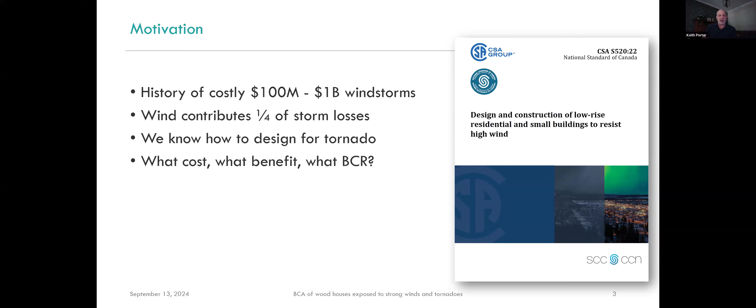Those features better ensure that the building transmits wind forces from the roof and the sides of the building, where the wind pushes or pulls on the building, down to the ground. A building that complies with that new voluntary standard can resist virtually every windstorm that Canadian weather can throw at it, now and for the rest of its lifetime.

But CSA S520 also reduces the potential for future damage. With those stricter requirements, you get less damage, less potential for damage. So CSA S520 helps to avoid future losses, which we can call a benefit of the new standard. We calculate the avoided future losses and say that's the benefit of the standard.

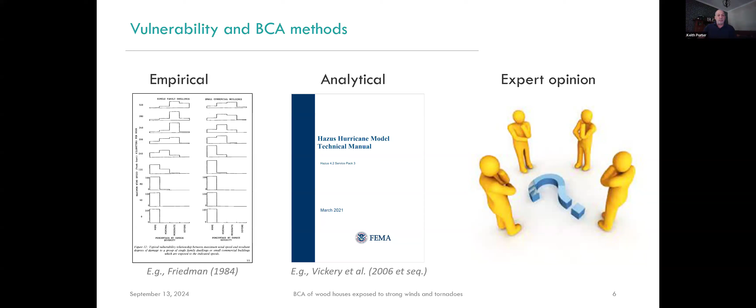And if an analytical approach exceeds your resources for doing benefit cost analysis, then expert guessing sometimes has to do. So these are the three methods one might turn to. In my presentation today, I'm going to talk about the analytical approach, which is what I had to do.

In this case, doing a hazard analysis means estimating how frequently and severely the wind blows on the building. Then you do a structural analysis, where you calculate the forces on the structural members, every beam, every column, every connection, given that the wind is blowing with such and such a pressure or speed.

Given member forces, we can calculate probabilistic damage to individual components in a damage analysis. What happens to the sheathing? What happens to the connections? What happens to the connection down to the ground? Then we can estimate the losses given the damage in what we call a loss analysis, such as the cost to repair the damaged building components.

And we can calculate a variety of performance metrics from the output of all that analysis, such as benefit cost ratio, among other things.

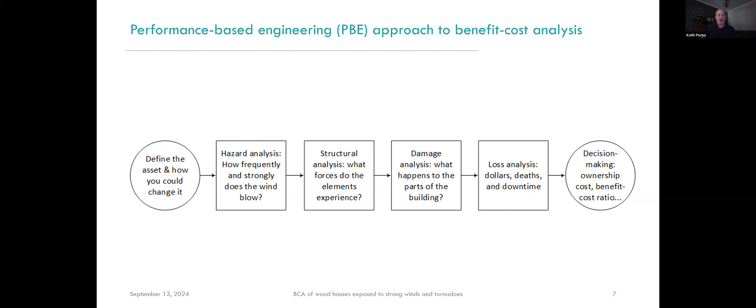So how do we do the asset definition for this particular case? What evidence do we have for the asset characteristics of the kinds of buildings we're talking about today? In prior work with ICLR and with Dan, I compiled a stratified random sample of 102 houses across Canada, 11 to 12 houses in each of 9 communities, ranging from small to large and east to west. The data generally come from Zillow and from Google Earth Street View, and they include things like latitude, longitude, stories, square footage, beds, baths, year built, cladding, perimeter length, and area, and so on.

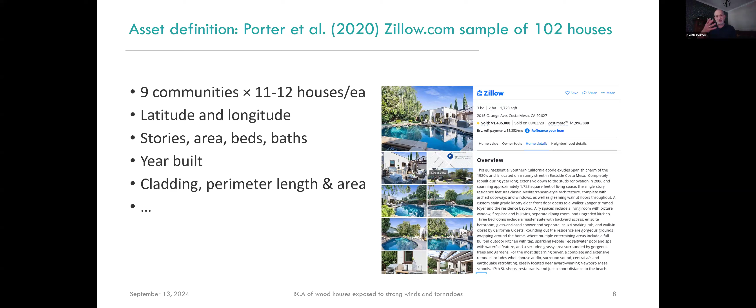The picture on the right just shows you what a Zillow listing might look like, where I could get all of that information.

Then we move on to the hazard analysis. That's where we calculate how frequently and severely the wind blows. For that, I drew on 2 sources. There is an organization called PCIC that offers future straight line wind hazard. That is wind pressure that has 1 in 10 year and 1 in 50 year exceedance frequency.

The Pacific Climate Impacts Consortium, PCIC, offers estimates of future weather under various climate scenarios. I used a sort of middling shared socioeconomic pathway that reflects 2 degrees centigrade heating. Canada has already warmed 1.2 degrees centigrade over the period from 1961 to 1990, and 1.9 degrees centigrade above the 1948 to 2022 period, according to Environment and Climate Change Canada. So 2 Celsius seems reasonable, and if anything, perhaps a little low.

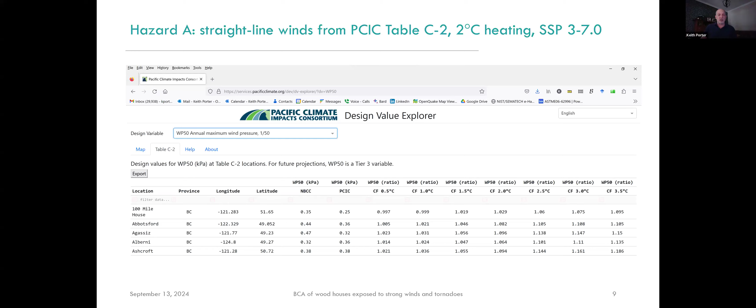So the PCIC data talks about straight line winds, the kinds of winds that we experience normally as weather comes through our communities, and it doesn't include tornadoes. To characterize the added hazard from tornadoes, we can draw on the Northern Tornado Project and from other publications.

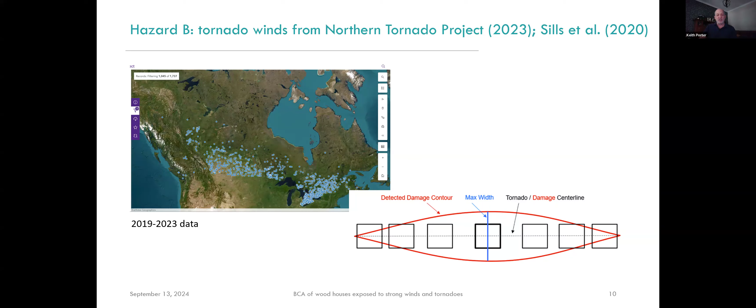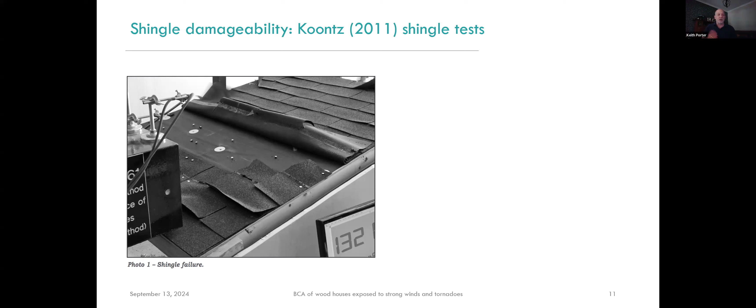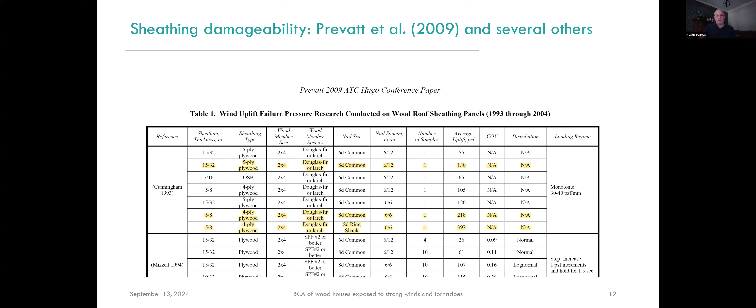Here are some tests of roof-to-wall connections. That's the connection between the roof truss and the top of the upper wall. We've got some from laboratory tests by this person Cheng, and there are some tests by Simpson Strong-Tie that we were able to draw on. That's a big manufacturer of structural components that we're able to draw on for this study.

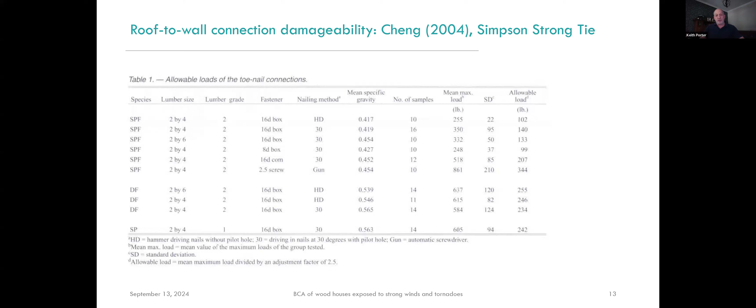Now, the published data of roof-to-wall connections didn't cover everything we needed. We had to perform some roof-to-wall connection tests with what you're seeing here is a 2-ton engine hoist.

We tested the toe-nailed connections that connect the roof truss to the top of the wall. You're seeing in the middle picture a couple of nails, that's two sides. This horizontal 2x4 represents the bottom chord of a roof truss, and there's two nails on one side and one nail on the other that connects it to the top of the upper story wall, represented by these two horizontal 2x4s here. The picture on the right shows this same connection after we pulled it apart using this blue engine hoist thing. So that gives us information about the capacity of this connection.

The toe-nailed connection, like you're seeing here in the middle, fails at an uplift force of about 160 kilograms per connection. That's the force that 3 strong men could impose on this connection. So 3 strong men could pull the roof truss off of the top of the wall.

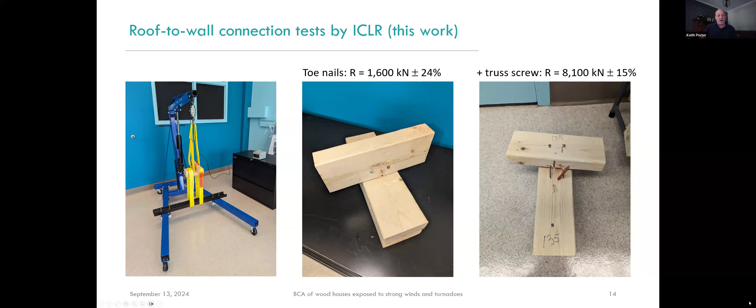The picture on the right shows this orange thing, that's a truss screw that increases the connection capacity by a factor of 5. That's much stronger, so strong men could not pull this thing apart. It's much more able to resist tornadoes, and add up all these orange screws around an entire building, and it adds about $190 to the cost of a house. So very strong for very low added cost.

Now, for the loss analysis, that's where you estimate the repair cost given the physical damage. We draw on a variety of authorities. Here are some sources of roof repair costs, other residential repairs, the cost to replace damaged content, the cost of additional living expenses - that's when you're displaced from your home and have to pay for a hotel or whatnot - and carbon costs. So these are sources for the dollar amounts that we apply to each of these sources of loss.

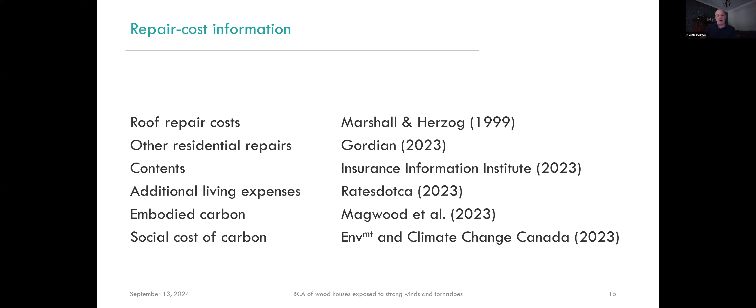Okay, so that was a sample of the literature we're drawing on. Now I'm going to summarize my analytical method. I defined the asset, the house, in terms of the building components that we normally use for structural analysis, with particular focus on the features that CSA S520 enhances. Those features are shown here, for example things like thicker roof sheathing and different sheathing nails and stronger roof framing and connections, roof-to-wall connections, and so on.

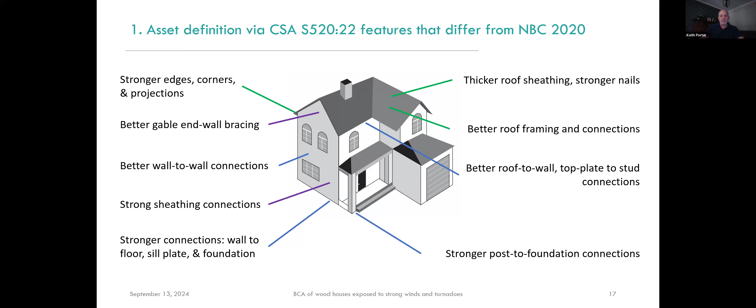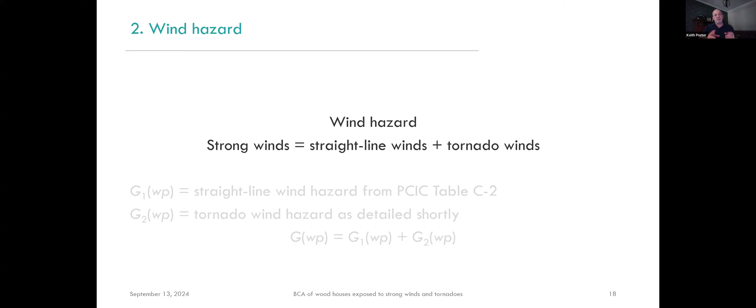Step 2, the hazard analysis, requires that we characterize wind hazard in terms of the frequency with which various wind pressures get exceeded. The exceedance frequency for any value of wind pressure is the frequency of that wind pressure from straight line winds - that's the normal day-to-day kinds of storms that we see - plus the frequency of that level of pressure from tornado winds. I'm graying out the math here and all the equations, just so you know the math exists and there are equations, but I'm not going to trouble you with walking through them.

Now, we want to design for strong winds without requiring that homes are built for winds that are extremely unlikely to experience in their lifetimes. Strong winds blow less frequently, weak winds blow more frequently. Some wind pressures are extremely rare, but can happen during the life of a building, albeit with low probability.

The building code has information about how strongly the wind blows in various places. It has a table, like the one shown on the left, that tells us how strong the wind is that has a 1 in 10 chance of striking your house in any given year, and a 1 in 50 chance of striking your house in any given year, for several hundred different locations around the country. Now, the picture on the right turns those 2 points, the 1 in 10-year wind and the 1 in 50-year wind, into a curve so that we can estimate how frequently other wind pressures happen at each of these places.

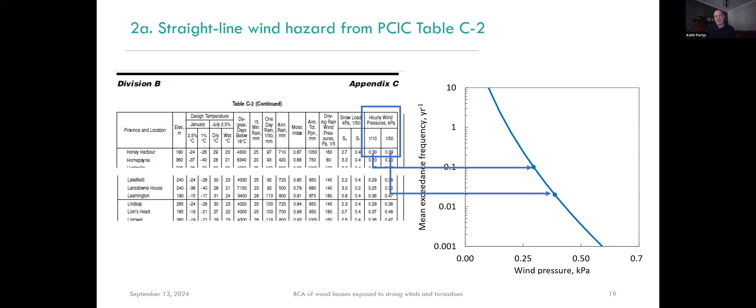Now, the climate's changing. The building code's table mostly draws on the past for its data, but we want to know about the future. The Pacific Climate Impacts Consortium, PCIC, that I mentioned before, estimates future wind hazard and provides a table just like the one in the building code, but reflecting future weather. That was the one where I told you we're going to use the shared socioeconomic pathway that assumes 2 degrees centigrade. So I use the PCIC table for my calculation of straight line wind hazards.

For tornado hazard, I calculated the exceedance frequency of various levels of wind pressure as a function of four things: the tornado occurrence rate per 10,000 square kilometers, the fraction of tornado track length that is EF0, the weakest tornado, EF1, EF2, etc., the tornado footprint area, that lens-shaped thing that has different lengths and widths depending on the maximum EF, enhanced Fujita rating scale, and the pressure distribution across the width of the tornado. A tornado has lower pressures and higher wind speeds at its center, and lower wind speeds, higher pressures at its edges.

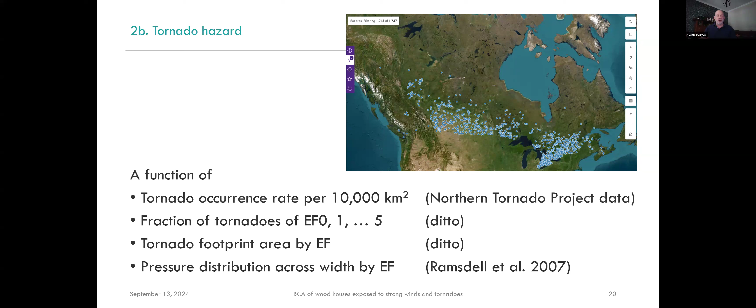I'm going to skip over the math once again for the sake of brevity. It's just an application of a theorem that multiplies different outcomes by the chance of each outcome occurring to give you long-term averages.

The third step is the structural analysis, where we calculate member forces conditioned on wind pressure. This isn't a webinar full of wind engineers, so I'm going to skip over the equations. Suffice it to say that I use the National Building Code of Canada's prescribed equations for the external and internal pressure on building components. I use that to calculate the force on every piece of plywood, every 2x4, and especially on the connections between them, the nails, the screws, the bolts, and so on. Those are the places where structural failures most commonly occur.

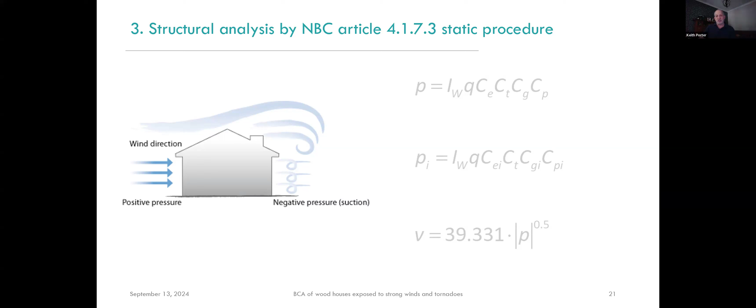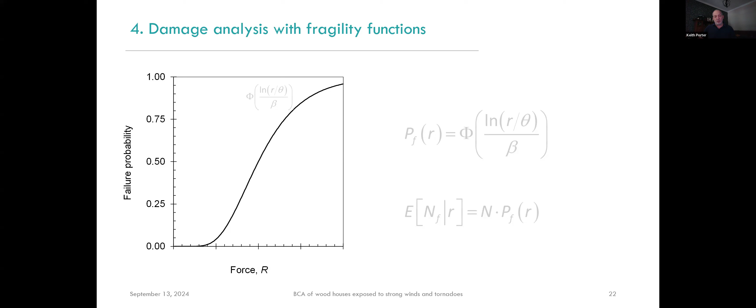The fourth step, the damage analysis, requires characterizing the failure probability of each damageable component as a function of the force to which it's subjected. We define failure in a way that relates to the repairs, such as tear off of the roof shingles. I'm going to skip over the math again. Curves like the one you're seeing on the left-hand side of the screen are called fragility functions. They tell us that if you put a specific force into a connection or some other part of a building, there's a chance somewhere between 0% and 100% that it's going to break. We make those fragility functions from laboratory tests, like the one I showed you with the big blue engine hoist, and some tables of other people's laboratory tests.

Now step 5 is the loss analysis. I've grayed out the equations, just know that they're there. You calculate the cost to repair a component category, like all the windows, as the product of three things: the failure probability per window, times the number of windows, and the unit cost per repair, the cost to repair one broken window. We're careful about double counting, and we also make reasonable assumptions about thresholds above which you just replace all the components, whether they're damaged or not.

You sum over the component categories to get the total building repair cost. You add up the cost to repair the shingles and the roof sheathing and the windows, et cetera, to get the total cost to repair. You normalize by the building replacement cost to get what we call the damage factor. So you might estimate 10% repair cost, meaning 10% of the cost to replace the building, and that's the degree of damage from some level of wind pressure.

We call a relationship between that percent repair cost and wind pressure a vulnerability function. We apply that vulnerability function to the building, to the contents, the additional living expenses, and to carbon, the value of all those things, to get the total loss at any given level of wind pressure or wind speed.

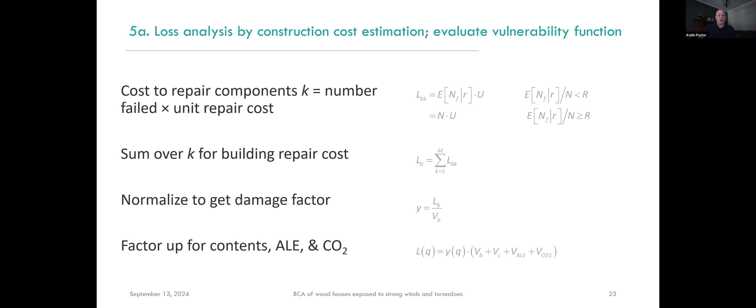Lastly, we calculate the benefit cost ratio. Again, I've grayed out the equations. The point is that we integrate the vulnerability function and the hazard curve to get expected annualized loss, the long-term average annual loss from winds. That is, we calculate the loss given that a house experiences 75-kilometer-an-hour winds times the chance that it's going to experience 75-kilometer-an-hour winds, and we add that with 70 and 80 and 85, et cetera, to get the long-term average annualized loss.

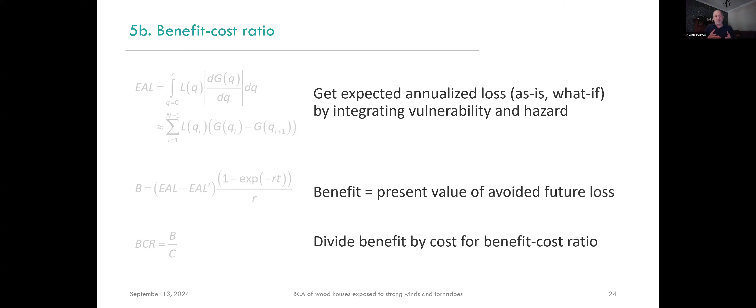We do that under two conditions: compliant with the National Building Code of Canada, and compliant with CSA S520. That's the long-term average cost under as-is and what-if conditions. The benefit, in terms of avoided future losses, is the present value of the difference between those two things, the present value of, say, $100 per year of loss under as-is conditions minus $50 per year of loss under what-if conditions. You add that up over a period of time and account for the time value of money, and that gives you a present value of the benefit, the avoided future losses. The benefit cost ratio is just the benefit divided by the cost.

Okay, so what I've shown you so far is a general method. Now I'm going to show you the results of when you apply it to new Canadian houses.

I told you that I need to define an asset. Now I got one from a company that we often deal with, Doug Tarry Homes. It's a very progressive builder.

Doug Tarry Homes provided us with drawings of a 3-bedroom, 2.5-bath that approximately matches the average newer house from that stratified sample I told you about earlier on with all the Zillow data. I've grayed out the interior features here, but the drawings show all the details, the materials, the geometry, and so on.

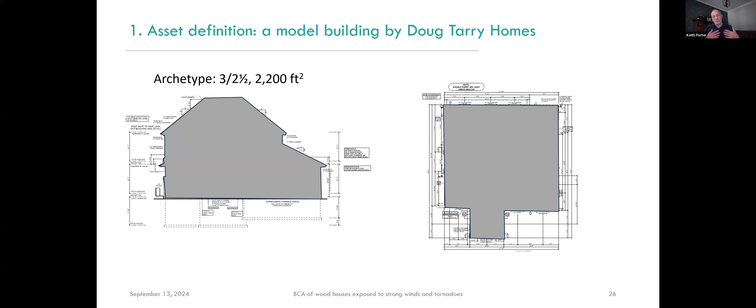I did what engineers call a quantity takeoff to calculate the cost to comply with CSA S520. Quantity takeoff just means, okay, how many square feet of roof cover and what is it you have to do differently to comply with CSA S520?

And in this case, you use 6 nails rather than 4 for the roof cover, and you have to estimate the cost for each of those things. In this case, it's 3 cents per nail, and there are about 2,700 nails on the roof cover of this particular house, and that means it adds $88 to the cost of construction to comply with CSA S520 versus not complying. You do that process for all these other differences between CSA S520 and the National Building Code.

You add in overhead and profit for the contractor, and you get a subtotal for the vertical, for the things that resist the vertical forces from wind, the tornado uplift. The added cost is about $3,600. That's about $1.73 per square foot, and that's consistent with findings from other sources that do approximately the same thing. So the vertical load path features of CSA S520 add about $1.73 per square foot to the cost of construction of a new house.

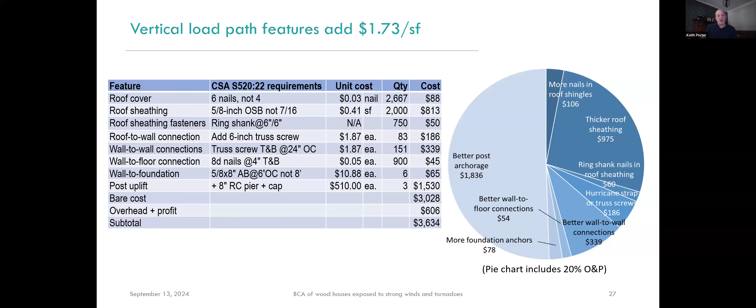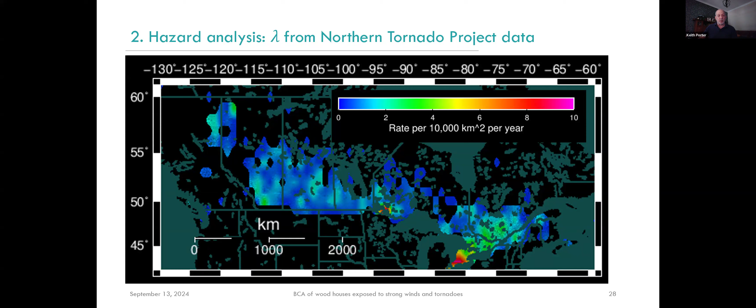Now, here are the resulting hazard curves at 50 pressure levels. Remember, I told you that the code gives us 2 pressure levels, and I fit a curve to that. For many pressure levels, I calculated the frequency with which 50 different pressure levels are exceeded, given the straight line winds and the tornado winds.

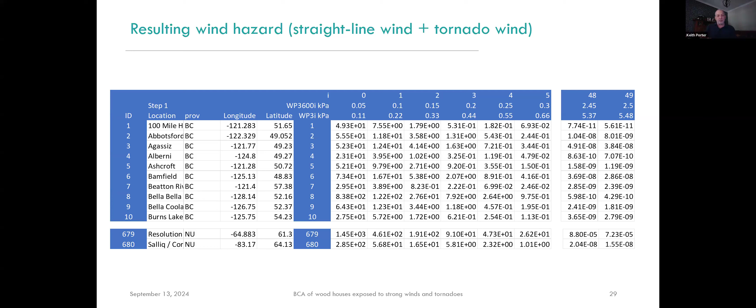So each one of these rows is one of those 680 places in Canada that the code talks about. And each of these columns is the frequency with which various levels of wind pressure, those are the blue column headers, is experienced or exceeded.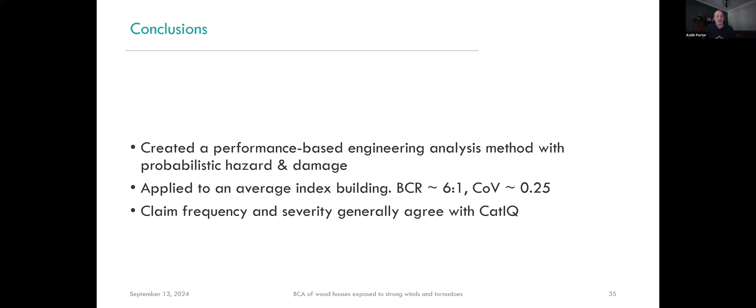Which means that for almost all locations, CSA S520 is cost effective. It saves much more than it costs. Now, there isn't much empirical data to validate the results, but my analysis roughly agrees with insurance claims data compiled by CatIQ.

Now, some limitations. First of all, I don't treat problems with inspection or non-compliance. These things matter, but they're separate questions. I don't treat differences in provincial codes. I only treat the difference between CSA S520 versus the National Building Code. And I told you that provinces adopt the National Building Code sometimes with minor differences. I don't treat wind-driven rain or water damage.

And finally, I focused on the vertical load path for manageability. That's the forces that pull upward on the building from tornadoes. I didn't treat lateral forces, the side-to-side forces.

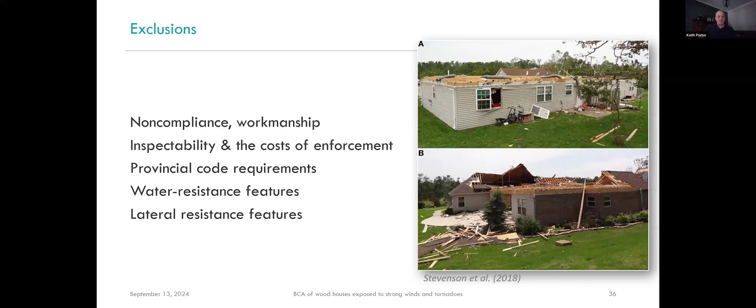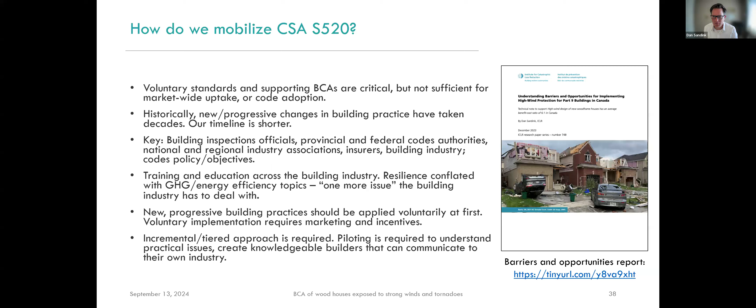Well, you can't go directly from the benefit-cost ratio to the benefits and costs that insurers enjoy. This is the long-term average—the present value of a savings stream that goes out over the life of a property, 75 years, using a time value of money like a 3% discount rate. Insurers are different—they're not society, and society is not a monolith either when it comes to benefits. Insurers tend to have a higher discount rate; their cost of capital is more like 7% per year, because they can use their capital to invest in the stock market or elsewhere and save more. So you tend to use a different discount rate when calculating present values as an insurance company.

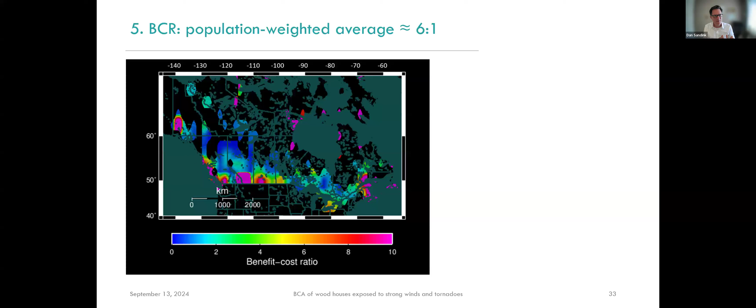Great, thank you. And maybe a related question. You had a chart in your presentation, I didn't write down the number, but it showed the expected damage to Part 9 structures or homes designed according to building code versus S520.

And yeah, there it is. I thought this was an important chart because it demonstrates the incredible impact of applying the measures outlined in CSA S520. That 0.5 kPa number, where damages start to escalate for a code-built home, is not a very severe wind event. We experience those wind events across Canada, on the shores of Lake Huron in Ontario. Ontario isn't considered a high vulnerability area, but along the shores of Lake Huron we definitely get wind events like this.

So it's a good demonstration of the impact of S520. I think maybe one last question—I'm seeing a few more coming in about the impact of... Oh, sorry, do you mind if I respond to that?

I mentioned David Prevatt early in my talk. He's the Florida structural engineer and a bit of a visionary in the United States. He wrote an op-ed in the Washington Post a couple of years ago, where he mentioned finding a publication from the American Society of Civil Engineers going back 125 years. It said tornadoes damage buildings, and this is how we can design them so they survive tornadoes. So David said, it's not that we've never been able to do this—we've been able to do this for over 100 years. We just chose not to.

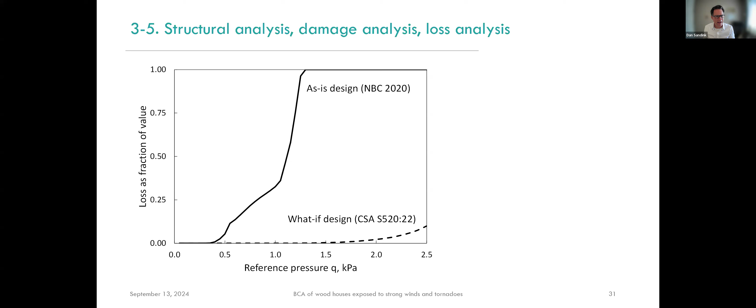Okay, one last question and then we'll wrap it up. You conducted a sensitivity analysis, incorporating climate change impacts into the benefit cost assessment calculations using the PCIC tool, which is a public tool available to everyone. One issue people run into is that confidence in future projections for wind is not as high as for, say, extreme heat and other impacts. If someone has to bring this to a councillor or mayor, and they push back saying we don't really know about high wind, how important are climate change impacts relative to just our existing wind conditions in these calculations?

Actually, I didn't test the sensitivity of the benefit cost ratio to which shared socioeconomic pathway. But I did assume a fairly conservatively low change in future weather—I didn't assume the equivalent of RCP 8.5, I assumed 2 degrees Celsius of heating. As I pointed out, depending on the averaging period, we've already experienced 1.4 to 1.9 degrees Celsius of heating. So if somebody says we don't really know what future weather will be like and there's great uncertainty, my response is: yes, but I made a very conservative assumption here, and it's still a benefit cost ratio of 6 to 1. The more skeptical you are of our ability to control global warming, the higher the benefit cost ratio actually becomes—so if anything, this is a low estimate.